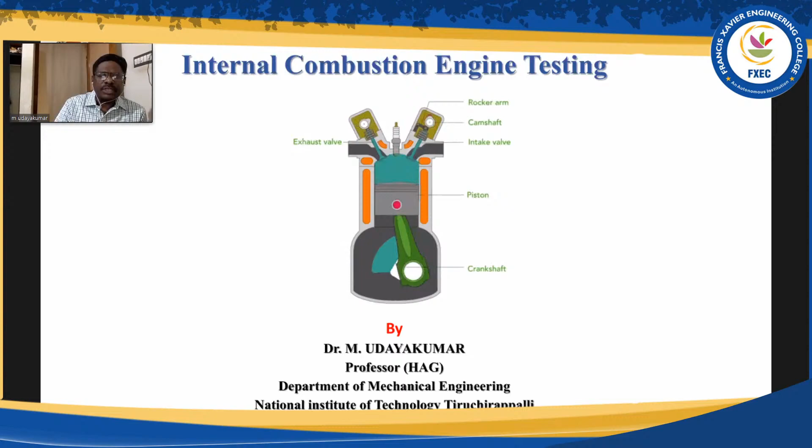Otherwise, the operational principle and the components present in a petrol engine and diesel engine are almost the same, except for the fuel injector and spark plug, as the case may be in diesel and petrol engines.

Now, the outline of this presentation - I have given many topics, but let me not go into all of them since we have to focus on testing. We'll briefly see the internal combustion engine terminology, the difference between petrol and diesel engines, operating and working cycles, and then performance of engines. This is what we will see. So let me move to the next slide.

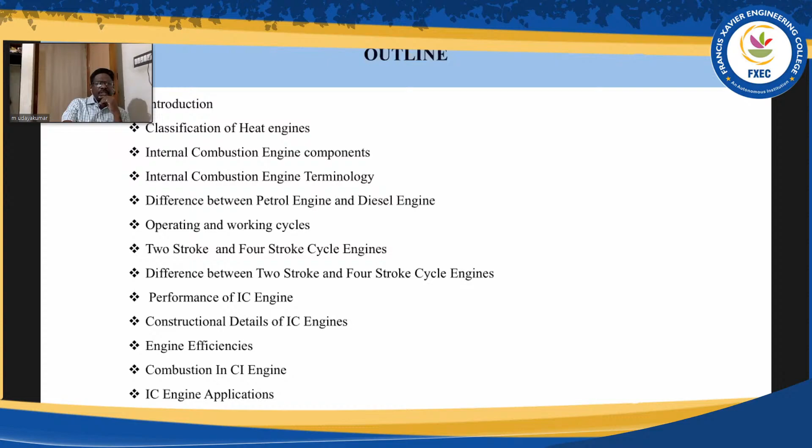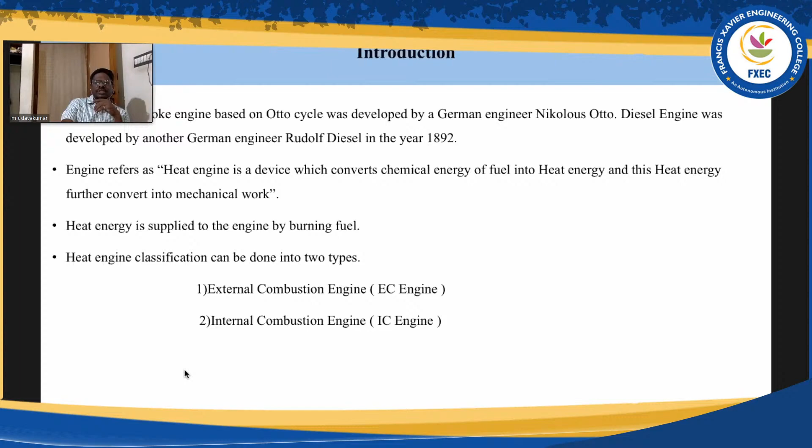This slide is not important to us because it gives historical aspects of how the engine got developed, so on. Now, this is also not so important.

Heat engines are engines which convert heat into work, and accordingly, a device which operates in a thermodynamic cycle, absorbing heat from a high temperature body and rejecting heat to a low temperature body, in that process producing net positive work, is a heat engine.

Thermodynamically, this is defined. Now, to this classification, to this definition of heat engine, we can have external combustion engines as well as internal combustion engines. IC engines normally are reciprocating type engines or rotary engines.

Internal combustion engines, as we have seen in the first illustration, receive the charge into the cylinder, burn the fuel inside the cylinder, and the heat produced is converted to work in the form of rotation of the crankshaft at a particular speed, and the torque delivered multiplied by the angular velocity at which the shaft is rotating gives us the power produced.

But as far as external combustion engines are concerned, they also belong to the heat engine definition only, but they use heat from an external source. Nothing is burnt inside. For example, in steam power plants or steam engines, steam is produced elsewhere - fuel is burnt in a furnace and the steam is produced in the boiler, and the produced steam is used to drive the steam engine or turbine.

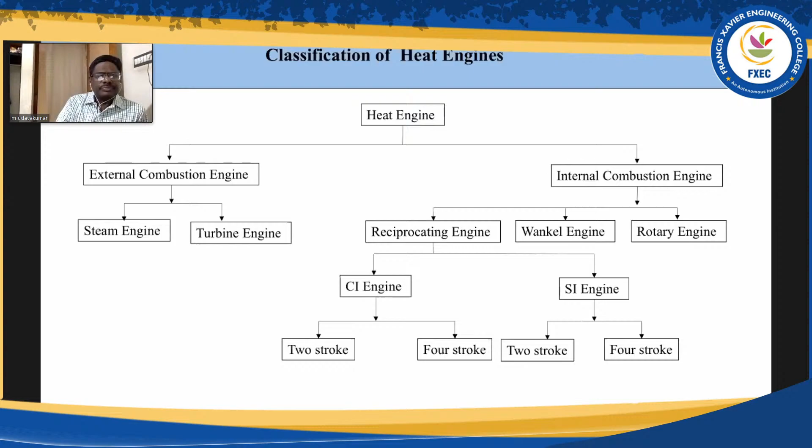So there's a main difference between SI engines and CI engines.

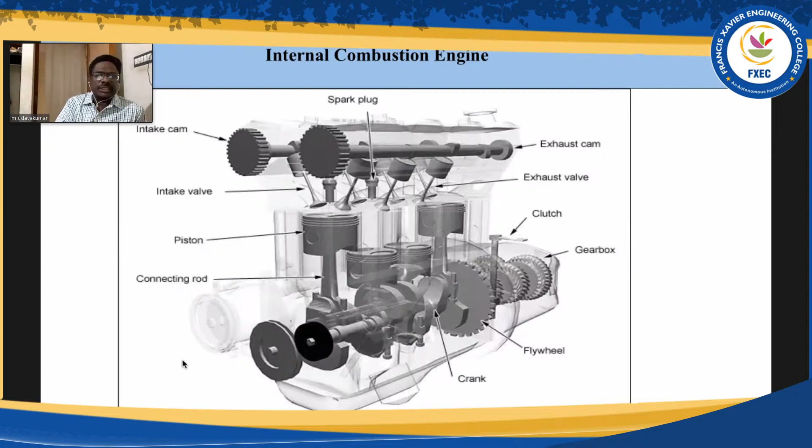Now, the various parts of the engine are shown in this illustration, which of course for mechanical engineers is very well known, so I'll not go into that.

As I just told you, the components in a particular cylinder are the valves - this is the exhaust line and this is the inlet line. These valves are operated by cams, which in turn are driven by camshafts, and the camshaft in turn is driven by the crankshaft using a timing belt or a timing gear.

You have the piston reciprocating inside the cylinder, and you have the connecting rod. The connecting rod connects the piston pin with the crankshaft, and you have the crankshaft web for better balancing.

And as the crankshaft rotates, the piston reciprocation is getting converted to rotation of the crankshaft.

So when we do the testing, what exactly we are doing is we are trying to apply a braking torque to the crankshaft. When you try to brake that, the piston has to overcome the braking resistance, and for that it has to consume fuel. The fuel is supplied through the supply line as far as SI engines are concerned. If it is diesel engines, it is injected in varied quantities through the injector.

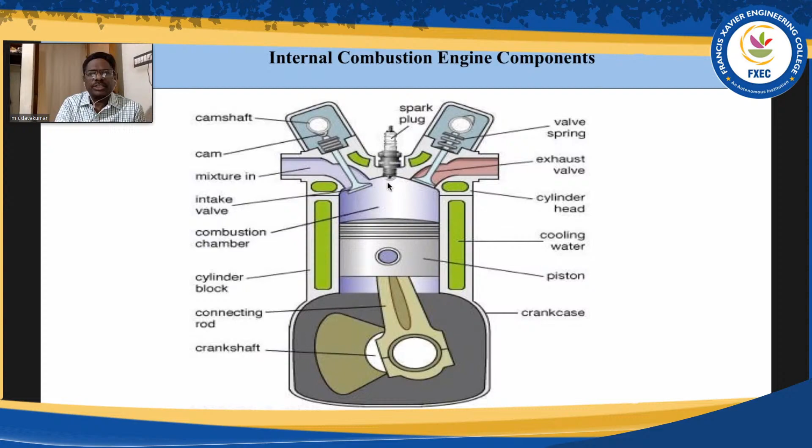Now, to do the testing, we have to have some knowledge of the various terminology associated with the engine so that we are able to conduct the test properly.

The terminology associated with IC engines: bore is the inside diameter of the cylinder. Stroke is the maximum distance traveled by the piston, which is equal to twice the crank radius.

The top dead center is the topmost position to which the piston can move. BDC is the bottommost position to which the piston can move. Between these two limits only the piston will reciprocate.

Stroke volume or swept volume is the volume displaced, which is equal to pi by 4 into d square into the stroke length L. Now that's what is shown here.

And compression ratio is defined as the ratio of the volume of the cylinder at BDC to the volume at top dead center, which in turn is nothing but the swept volume plus the clearance volume divided by the clearance volume.

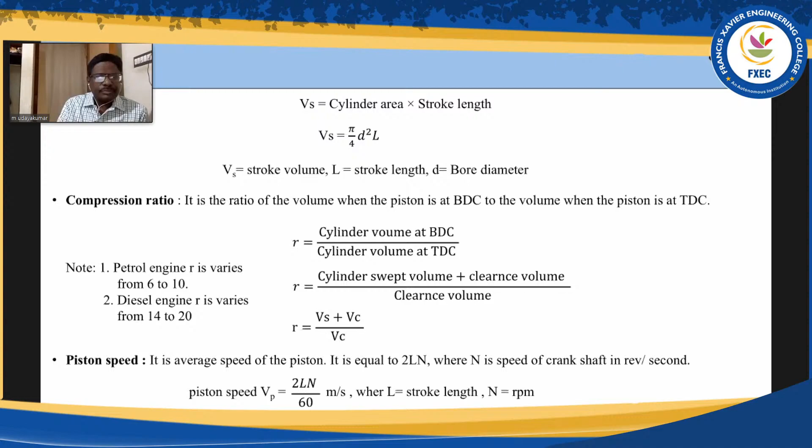An engine designer takes into consideration certain parameters with which he designs the engine. The parameters considered are compression ratio, mean piston speed, brake mean effective pressure, and SFC. We will see later what brake mean effective pressure is, but this I will skip since I've already told you.

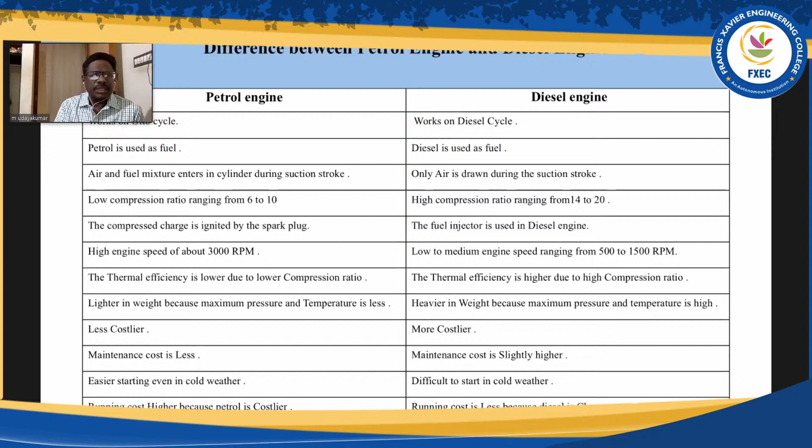Now coming to the operating cycles of these engines, the Carnot cycle is the ideal cycle, and this cycle gives the highest thermal efficiency. However, in practice in IC engines, it is impossible to realize. So we don't go for the Carnot cycle in IC engines.

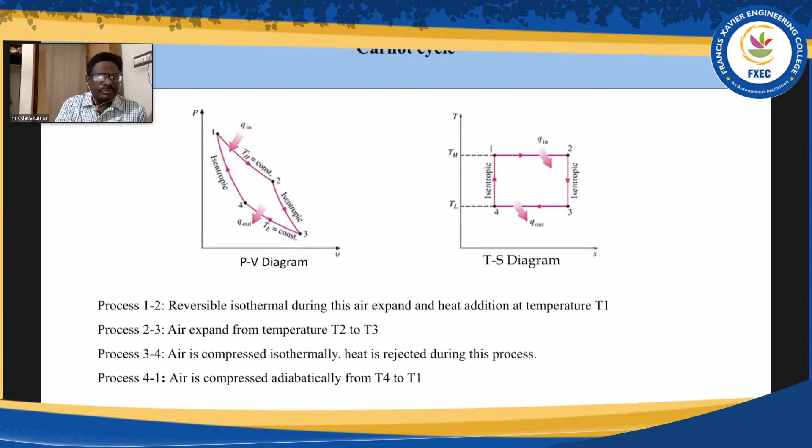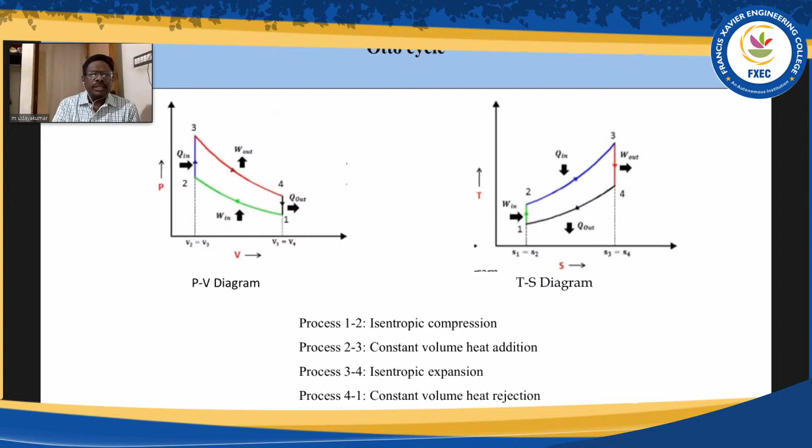Instead, in SI engines or petrol engines, the Otto cycle is the ideal cycle, where you have a reversible adiabatic compression followed by constant volume heat addition, then reversible adiabatic expansion followed by constant volume heat removal. The area enclosed by this cycle 1-2-3-4 is the ideal work produced by the working fluid during an Otto cycle, and the efficiency of this cycle, using thermodynamic relations, is found to be a function of only the compression ratio.

Similarly, the diesel cycle, which is the ideal cycle representing the working of diesel engines, has a reversible adiabatic compression process followed by constant pressure heat addition, then reversible adiabatic expansion followed by constant volume heat removal. This cycle has slightly lower thermal efficiency for a given compression ratio compared to the Otto cycle.

However, this cycle is preferred when your ability to increase the compression ratio is more. So in diesel engines, the compression ratio is increased, and accordingly, for the same quantity of heat added, we can get more efficiency. So the efficiency of this standard cycle depends not only on the compression ratio, but also on what is known as the heat addition cutoff ratio. These two parameters determine the efficiency of a diesel cycle.

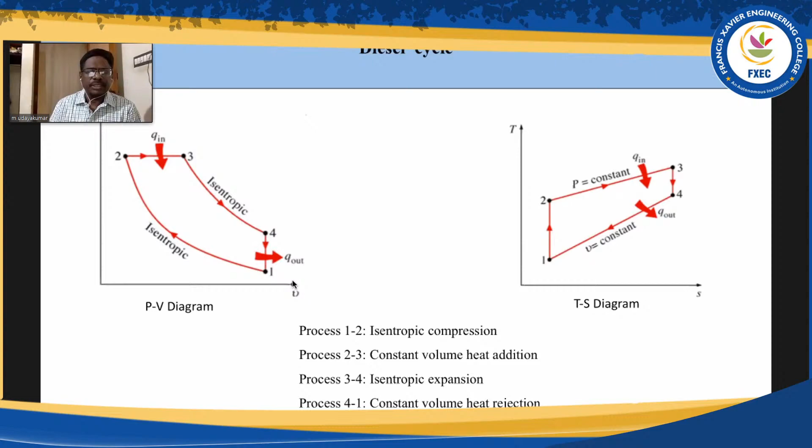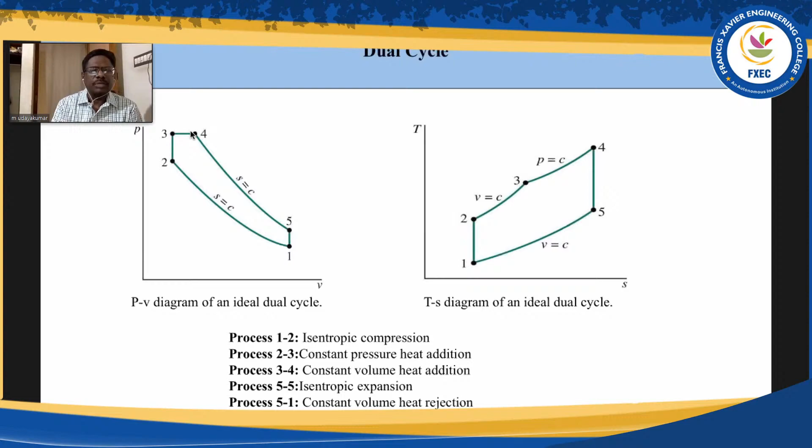Then you can have a dual cycle, where part of the combustion happens at constant volume and part at constant pressure. Now, in two-stroke cycle engines, all four events—suction, compression, power, and exhaust—are completed in one revolution of the crankshaft, whereas in four-stroke cycle engines, we require two revolutions to complete one cycle.

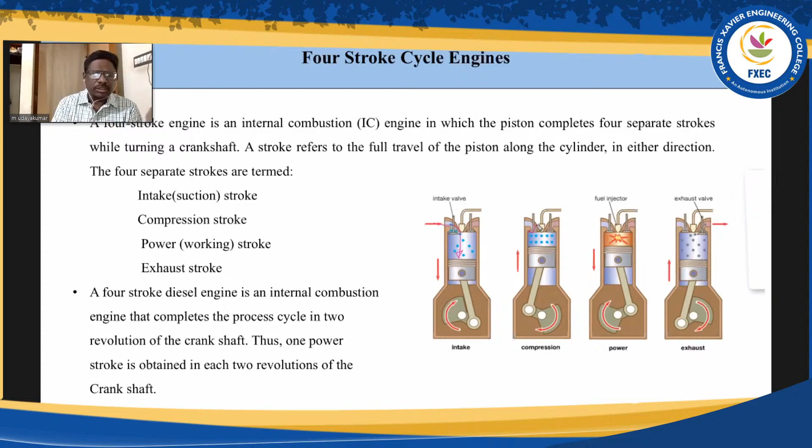Let's not go into this further—we have to focus only on testing. Now coming to the testing, the test bed comprises this setup.

You would have seen in your institution's thermal laboratory an engine connected to a dynamometer through couplings, and the exhaust gas line. We have connected a probe through which a sample is taken and the exhaust gas is collected and analyzed, or the amount of exhaust gas constituents during a given testing is indicated by this instrument during the testing.

Then we measure the fuel flow using a volumetric fuel flow device, namely a burette, to measure the time it takes for 10 cc of fuel to be consumed. In addition, we can measure the airflow rate also, so we will know the volumetric efficiency of the engine, and also be able to conduct the heat balance.

This dynamometer is a loading device with which we apply braking to the rotating shaft of the engine. As you apply the brake, the engine tends to overcome the applied braking torque, and accordingly produces that much torque by consuming fuel. So you measure the braking torque and the speed—you know the torque and you know the omega, so the power produced is known.

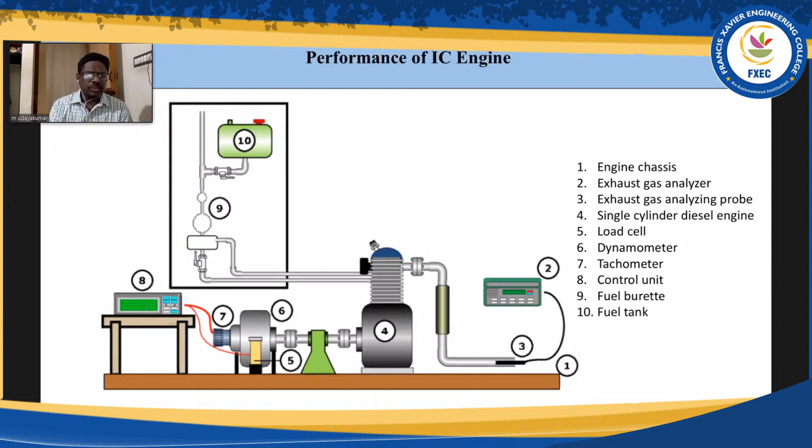This is what is done in most of the engine manufacturing units and in the engine assembly factories. They have to ensure that the combustion efficiency is high and the rate of pressure rise is within the limits so that the life of the engine is ensured. So this type of test rig is what is used to conduct the tests.

When you conduct the tests, what are the efficiencies that you determine? You determine the mechanical efficiency. The mechanical efficiency is the ratio of brake power to the indicator power. What is brake power? Brake power is the product of the torque developed at a particular condition and the angular velocity omega, where 2 pi N by 60 is omega.

So you run the engine at steady state conditions, namely at a constant torque and at a constant speed, and measure the fuel consumed under steady state conditions and calculate the brake power.

Now, indicator power is given by the indicator diagram, and the indicator diagram has an area, and this area is having the ordinate as indicated mean effective pressure, and L into A is nothing but the volume per cylinder.

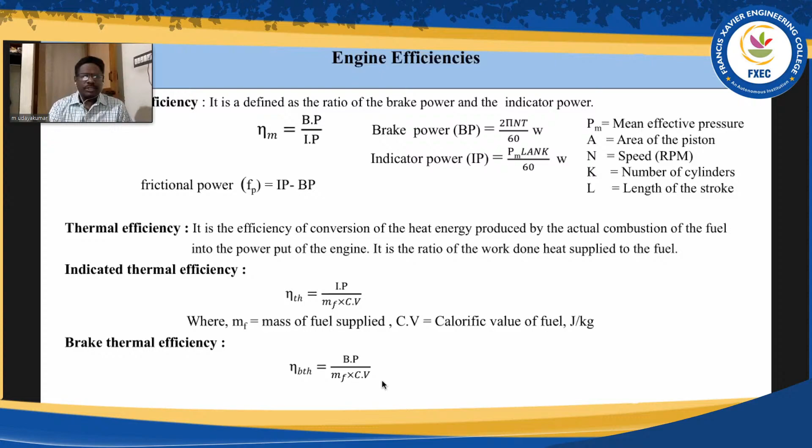Now the mean effective pressure is calculated as follows. The indicated mean effective pressure is given by 60,000 into IP by L A N into K, where N is the RPM and K is the number of cylinders.

The brake mean effective pressure is given by this similar relation. I told you earlier that the brake mean effective pressure is a design parameter. Now let us assume your company or your organization builds an engine which is to deliver say 850 kilopascal of brake mean effective pressure.

Unless that engine, which is built with steel, cast iron, aluminum and other components, follows proper manufacturing good practices, with excellent material identified, still when you assemble all the components with proper lubrication and when you do the running...

You design the engine to give, let us say, 850 kilopascal mean effective pressure. But if it gives only, let us say, 800 kilopascal, well, that is the maximum possible. That is what is realizable actually. Right? Now this realizable value...

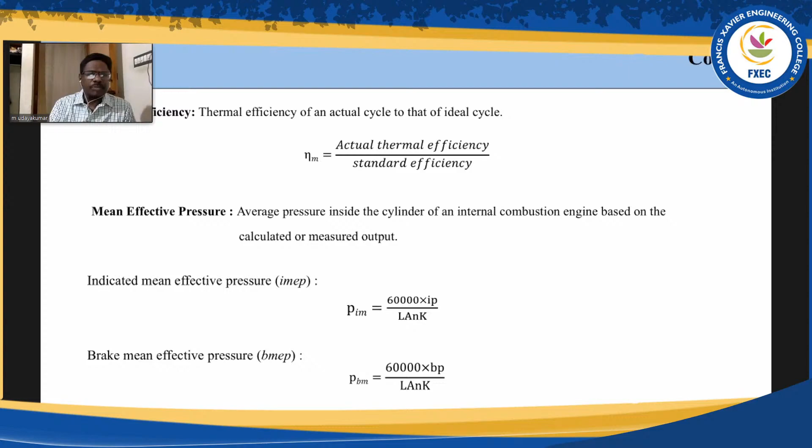And the reciprocal of this, as far as the power produced is concerned, similarly the fuel consumption is to be measured for the given power production. So that quantity is known as specific fuel consumption or brake specific fuel consumption. This brake specific fuel consumption is nothing but the mass of fuel consumed in kg per hour for the given power being produced under steady state conditions.

Now if this SFC value is higher than the nameplate value of the engine or the manufacturer's claimed value, then your engine is unable to convert the fuel chemical energy into useful work properly. So it is inefficient, and it is time to improve the efficiency by carrying out maintenance activities. If still, with maintenance activities, your SFC is not improving, then it is time to scrap it or go for a better engine.

So these are some of the tests that are conducted, namely the fuel consumption test, which leads to measurement of SFC, the load test, which gives us an idea about the mechanical efficiency, a measure of the friction associated with the engine, and the brake mean effective pressure, which is a measure of how well the engine is converting the fuel chemical energy into brake power or useful power.